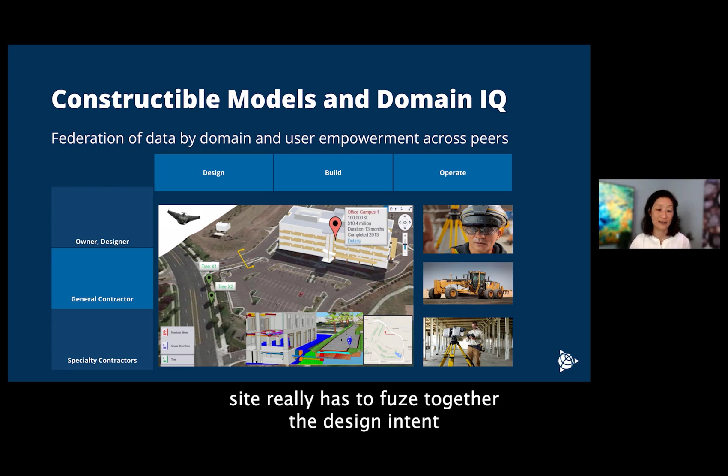Trimble uses this notion of constructible models and domain intelligence. This is how we represent a source of truth for the data at every stage. Primarily, the build phase in a connected construction site has to fuse together the design intent and the expectations in the life cycle of how that asset will be operated.

Not only is that a broad set of data that is shareable, but it needs to be served up to the actual domain—whether it's an owner needing the data or real-time updates, or a general contractor trying to coordinate a number of specialty contractors. There is no one single model to rule them all, but more distributed and federated data that comes together in the broader system.

Spatial anchors is something Trimble worked very closely with Microsoft on. How do we take spatial awareness and ground it to digital models within physical reality? The notion of spatial anchors is a mixed reality technology where we can perceive spaces and designate markers at precise points of interest in the physical world.

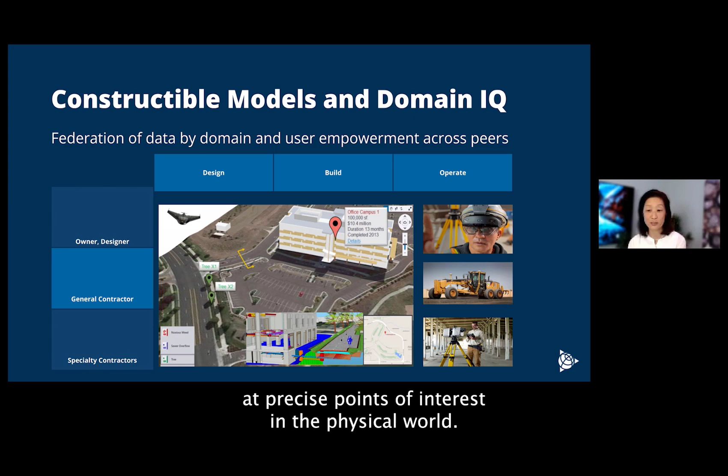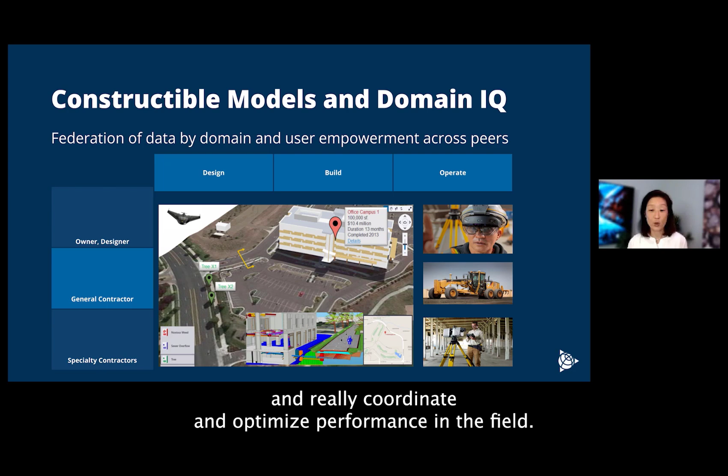This also helps create visual anchors. Someone in the top right there is wearing the lenses. We had a product from Trimble called the XR10, where we used our Connect collaboration technology with Microsoft HoloLens technology to bring together an experience for a user in the field, improving the precision and accuracy of the data model overlay and coordinating and optimizing performance in the field.

It was originally done for training purposes, and now even for expert users, the ability to get the data at that point of work is super efficient and avoids a lot of rework. The key is really how we handle that federated data, understanding who the user is and what data they need, and the contextual data needed for situational intelligence.

This moves us from linear hierarchical handoffs to more coordinated contextual information at the application and user level. Now that we understand who the user is and what data they need, this is bound together at the level of workflow orchestration.

Workflows orchestrate the data and the users at a point in time, enabling both bidirectional data flows as well as iterative engagement models and a closed loop where we can constantly check the desired state or design intent against the actual physical conditions.

This is also leading to more effective as-built information as an extension of the actual design models. We can manage exceptions, and we can also manage change at the level of composable objects, whether those are model objects, content, or asset inventory data.

Trimble recently acquired Agile Assets, who has been using digital twin technology for things like roads and bridge inspection and better preventive maintenance for the physical world. The key thing is that the delivery model also changes to everything as a service, and this is where cloud technologies are most desirable—a lot of the underlying enablement is hidden from the end user.

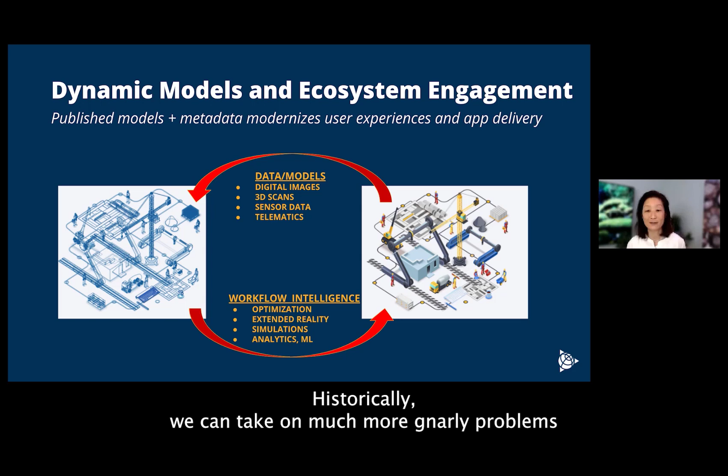So there's a lot of complexity, but I'm very bullish as we build more extensible models for what is to come for the future, as opposed to automating tasks that have been done a certain way historically. We can take on much more gnarly problems, as well as evolve the incentives to be more carrot versus stick, and not just managing risk, but really thriving with a growth mindset.

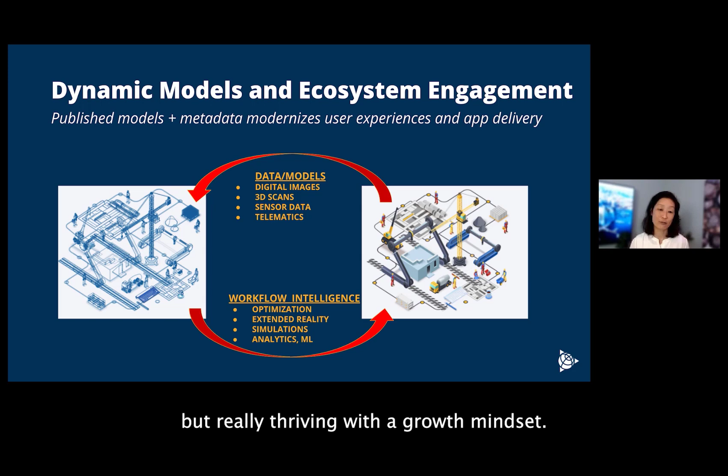Publishing these models and best practices across the industry also helps us just modernize the industry and digital app delivery. I think it not only helps us recruit the next generation into the industry, but it also unlocks a lot of the creativity and safe experimentation that we're going to need to tackle a lot of society's biggest challenges moving forward that will fall on the design and construction industry to take on.

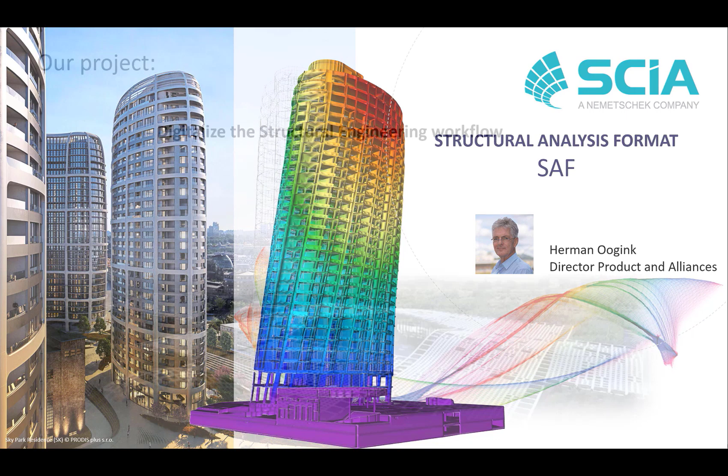Hello, my name is Herman Oogink and I'm going to present you the structural analysis format called SAF. I have been involved in this project from the beginning and I'm proud to be able to present it for this audience. Let me first explain where it all starts.

At Nemetschek we started a project focusing on improving the workflow for engineering. It's a broad project and still ongoing. For that we interviewed many engineers around the globe. One of the findings was that engineers would like to have an easy to use exchange format for their analysis model. So we dived a bit deeper into that and found the next demands.

Be able to check the analysis with other software without entering the whole model again. When there are complex models, they want to use tools to create these shapes and need to get that into their analysis software - tools like, for instance, Grasshopper. Also, adjusting models via an easy format can speed up the design process. Be able to do checking of models after analysis with other available tools, for instance do a connection design after you have analyzed your model.

And be able to read in-CAD embedded analysis models. Be able to read the in-CAD embedded analysis model. Now only proprietary formats are used.

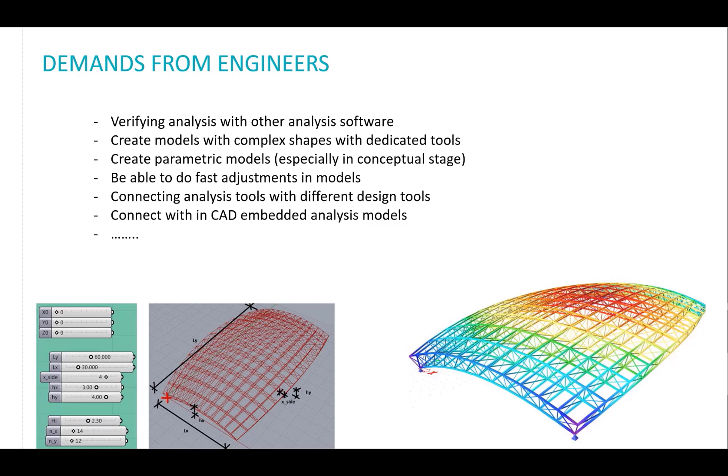Based on this input, we created SAF, Structural Analysis Format. It is an easy to use format for all kinds of structures and can be used for exchanging models, but can also be used for creating models manually or via other dedicated tools, and it is based on a tool that all engineers love, and that is Excel.

As said before, Nemetschek took the initiative, and to be more precise, it is SCIA who is leading this. But it is an open format and we encourage you all to join. It's not intended to make it a Nemetschek standard.

Let us now look at the format itself. You see here the Excel layout, and each sheet in the Excel is an object type like beam, slabs, boundaries, etc. Each row is an instance, a specific element, and each column contributes or stands for an attribute.

Let us look at how the relation between the objects are defined. We have, for instance, an object node defined on a specific sheet called the structural point connection. These nodes have a name, and these names are used in the definition of structural curve members, structural surface members, and structural surface opening.

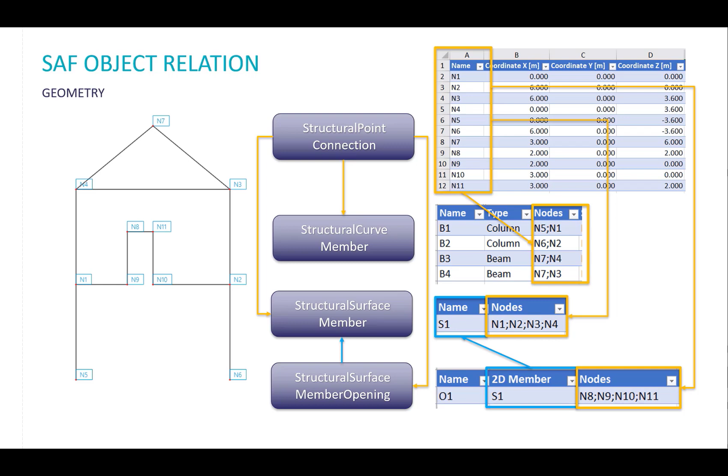Also for cross sections, we have a sheet where these object types are defined. Each cross section has a name. When defining the structural curve member, these names are used to refer.

Material is also an object that has a name. This name is used in the definition of the cross section and via the cross section to the structural curve member. And it is used in the definition of the structural surface member.

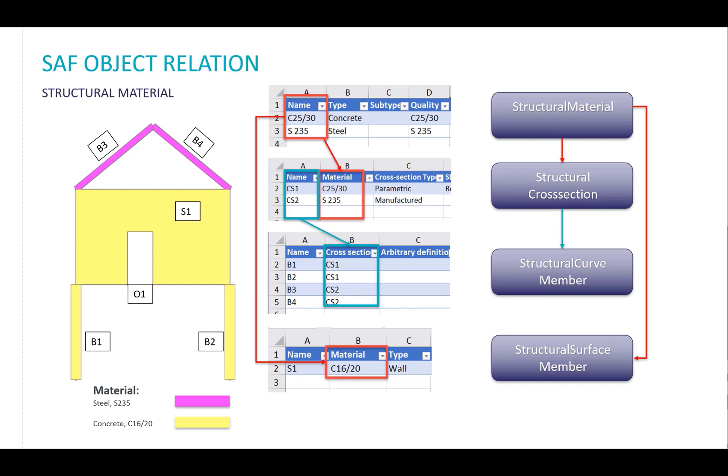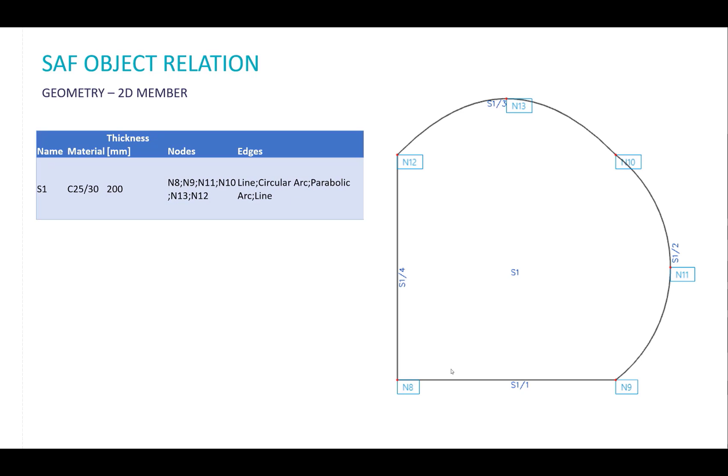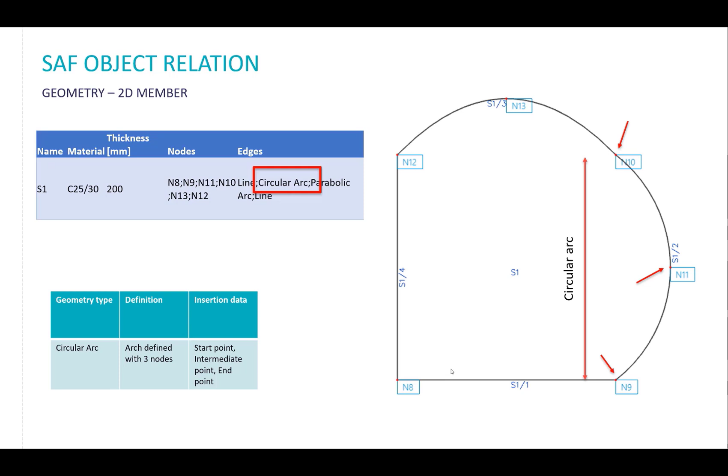A bit similar is the definition of the geometry for surface members. The edges can be defined via a line, parabolic and circular arcs and Bezier curves, as you can see. Also here we start with defining the edge, start node N8 and end node N9, with a line in between. And then we have, for instance, the other curve, which is a circular arc with a start node and an end node and an N11 as the intermediate node.

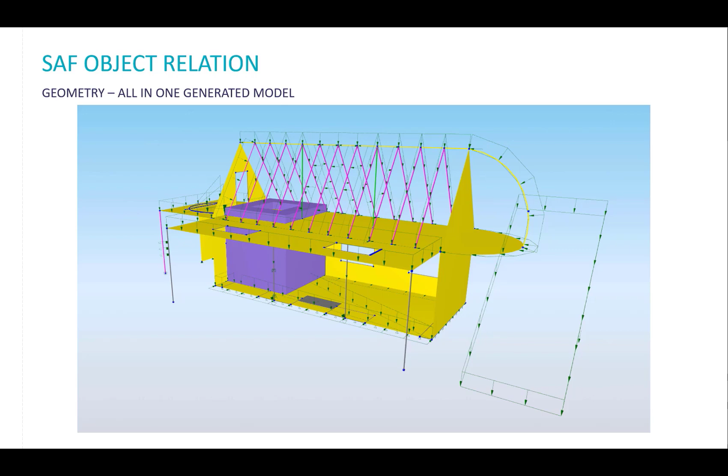Here is a non-realistic example containing all objects we have defined so far, and this we are using for testing. I think it's not realistic, but I think it's a nice way to test the import and the export of the SAF model.

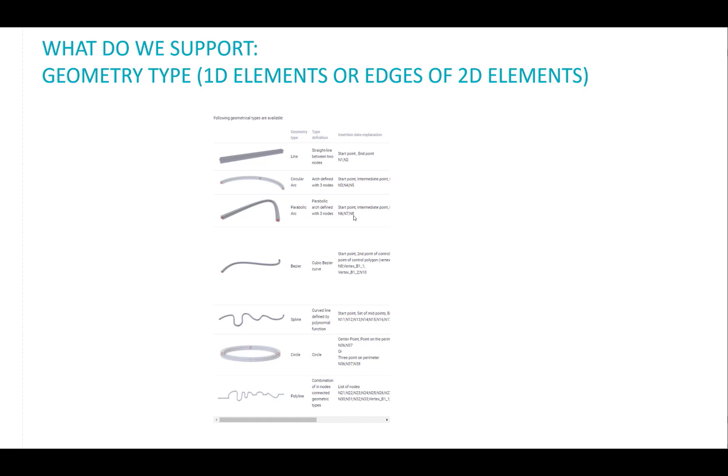Let us now have a look at the geometry. Here you have an overview of all geometry of curved members and the edges of surface members that we support. We have lines, circular arcs, parabolic arcs, Bezier curves, splines, circles and polylines. This counts for the 1D curved members and also for the edges of the surface members.

We also support curved members with varying cross-section. The beam is then separated into segments, and each segment has a cross-section at the beginning and at the end.

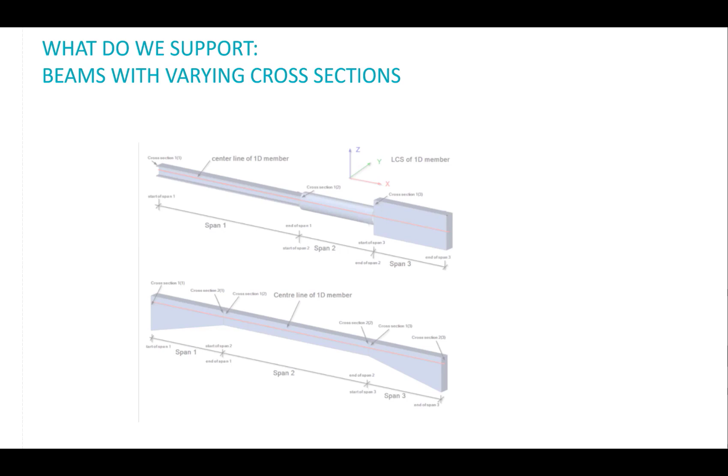Let us now look at the different cross-sections we support. We have the parametric shape, the compound shapes, the general cross-section defined by polygon, and the manufactured profile. Let us look at them one by one in more detail.

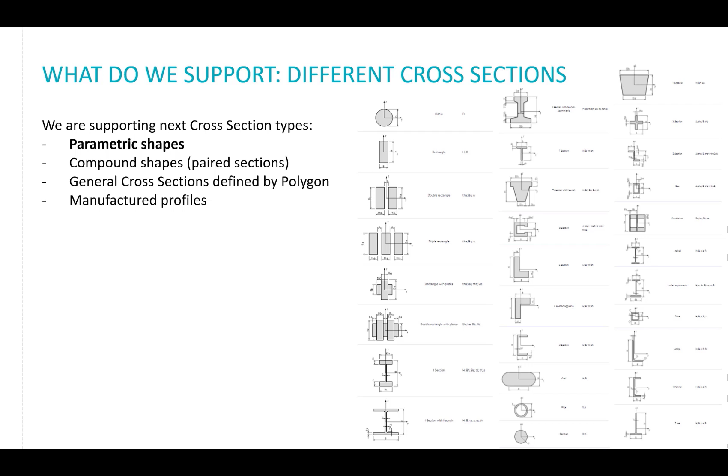The parametric cross-section we have defined in SAF, you see on the right side. You see all the shapes, and each shape has the parameters needed to define it. As you can see, it's quite an intensive list of possibilities. The same counts for the compound sections, where the most common used paired sections are defined.

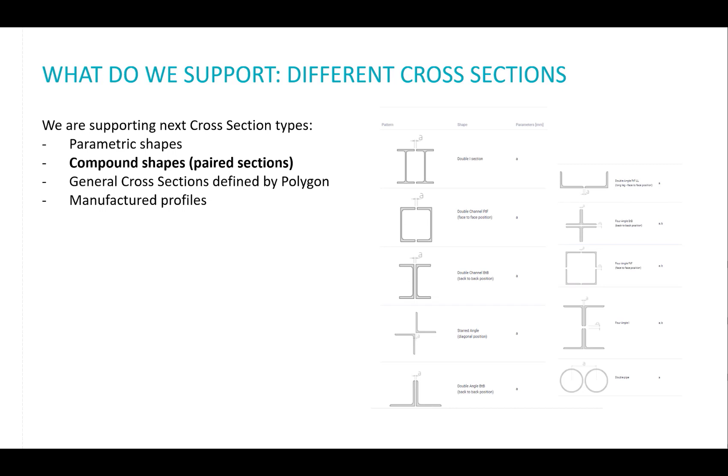The general cross-section definition is the most general one. As the name suggests, here you can define each shape composed out of different materials and openings. So here you see, for instance, one material with opening, a cross-section with opening, and here for instance a concrete rectangle cross-section with a steel section inside. So really a composite cross-section is what you are creating.

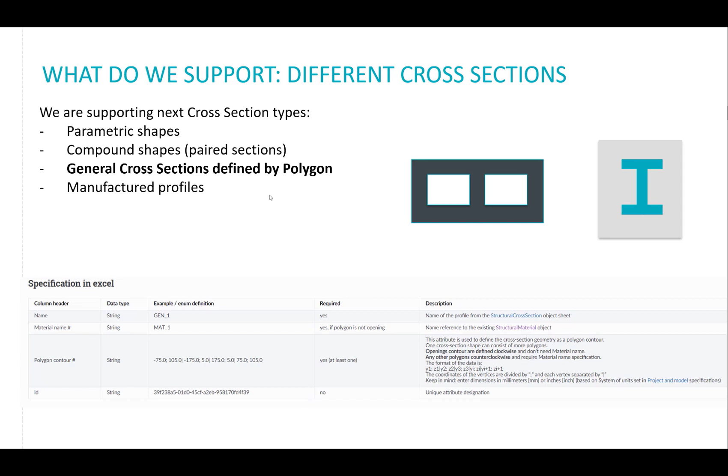Then we have the manufactured one. Initially you would say that is the most easiest one, but it isn't. The complexity is in the use of naming, which is not standardized, but also the definition of the local coordinate system that is used in the manufactured cross-section libraries by each software vendor.

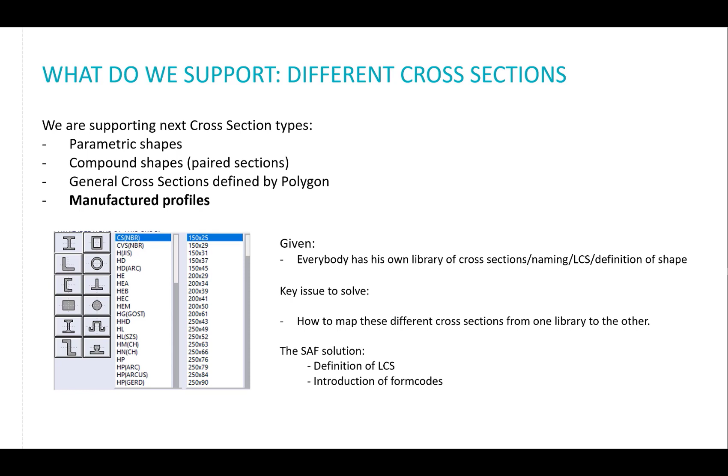But only with an alignment of the local coordinate system we are not done. How the shape of, for instance, the T-section is defined in the vendor's library can be different - the flange at the top or at the bottom, for instance. Both ways are used. Or what about an L profile - how is that oriented in the local coordinate system by the vendors? To solve that, we invented the so-called form code that defines the orientation. I will explain this a bit more in depth in the next slides.

In SAF, you have to tell which local coordinate system is used when writing to SAF, so the receiving party knows it and can act upon it. So one of the model data is how the local coordinate system is defined by the one who wrote that SAF file.

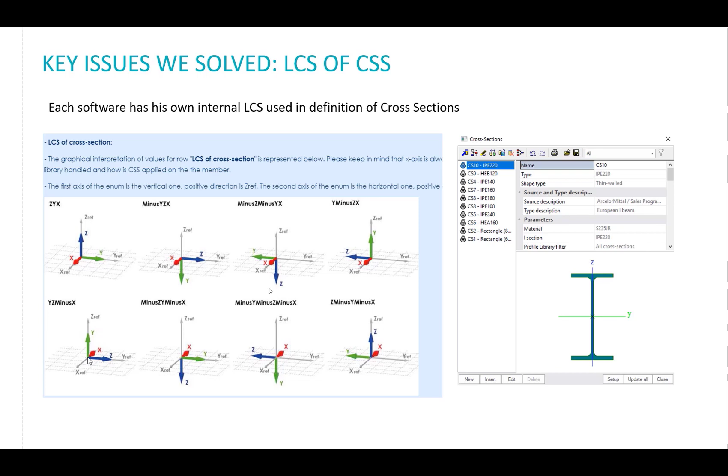The other topic is the orientation of the shape in the local coordinate system. As said before, some define a T with flange at the top and others with the flange at the bottom. Here you see, for instance, a T-beam could be defined like that, or like that. For that we defined a form code for all kinds of shapes and orientations. If you see this table here, we have different form codes - in total about 23 form codes defined. You see for a T with the flange at the bottom we use 6, and for flange at the top we use 9. The same for the L profiles, we have different numbers for how those profiles are defined.

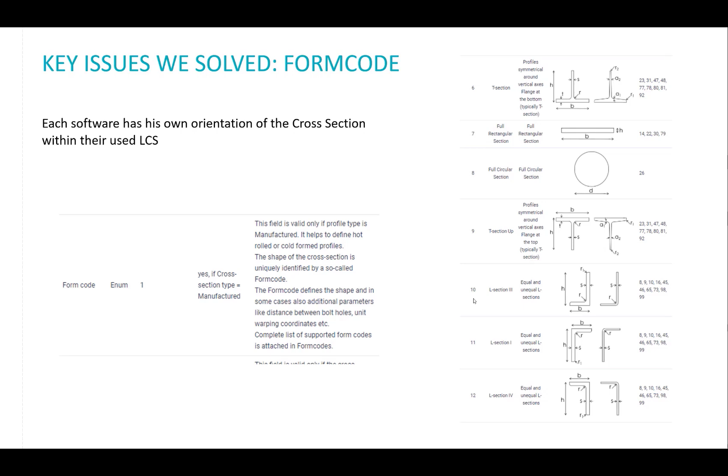We also thought about interaction with CAD systems. Curved beams or walls, etc. are common in CAD systems, but not all analysis software can handle that. For that, we introduced the possibility of having a curved wall as parent and dividing it into straight segments that are charged from the parent curved wall. With that, we have a relation that can be kept, and in the analysis the wall is calculated in segments, but we keep the relation with the curved wall in the CAD system. So if you want to do round tripping, that is secured in this way.

Another development we did is making a software development kit available for vendors to be able to implement SAF in a fast and easy way. It's written in C# and available on GitHub. It covers automated unit and integration tests. It is already used by a lot of vendors who support SAF at the moment.

Now the highlights of the SDK is that old and new versions are supported. It's up and downwards compatible. All objects are validated, and we support metric and imperial units. With validation, I mean we check if the input is valid. Are you referring to a material, and is that material defined? Referring to a cross-section, is that cross-section defined, etc.

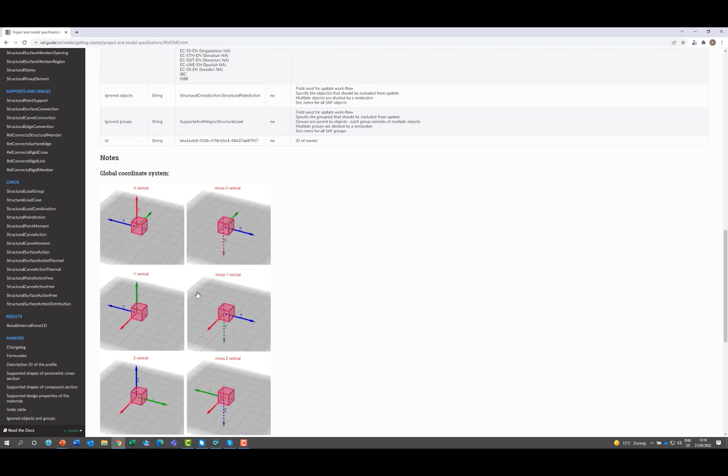And here you see the definition of those global coordinate systems, which I mentioned before. We have the curved members, for instance the curved member varying, it's defined how the attributes have to be defined. We have the surface structural edge connections, for instance the boundaries, how we define them. We have the loads defined here.

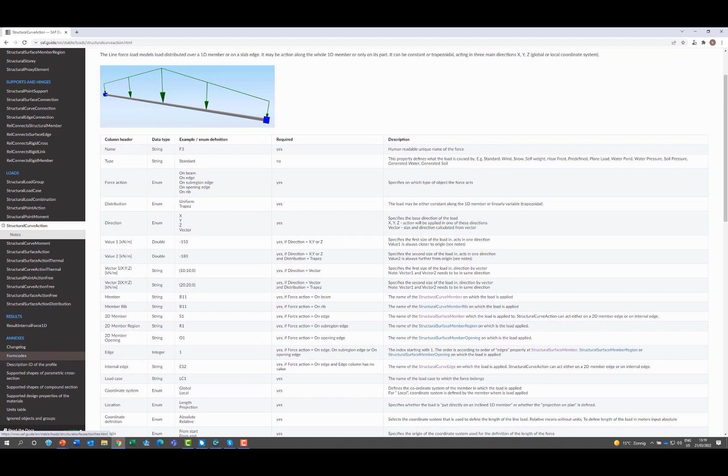We have the curve action, let's have a look at this one. And also the results, internal forces, which are already explained - that's quite new - for 1D elements, so you have your internal forces available. Here we have the form codes, all the different form codes for all the shapes you can imagine. So we are coming to 23 form codes.

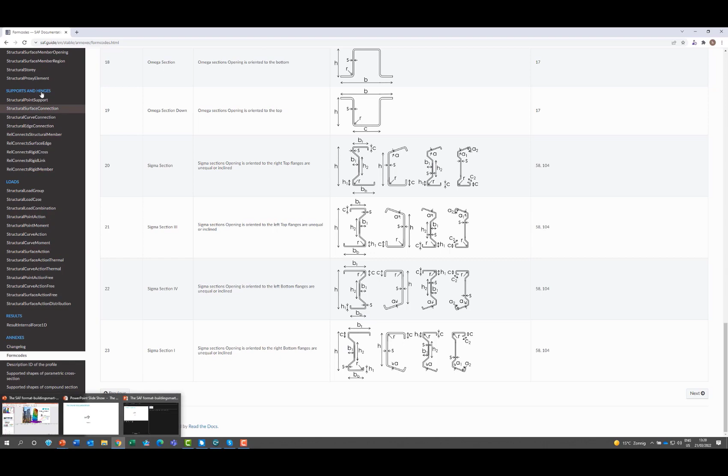And I think that's all I want to show you. You can go to it, it's saf.guide. It's available for everybody. Just click on it, go to the website, or just type in saf.guide and you can use it. Well, let me go back to my presentation.

So how do we work? Now, we use GitHub and Microsoft Teams for communication. We have a general chat for all participants, so if we want to discuss something in general. But we also have a one-to-one chat for implementers, when they are dealing with a specific issue topic which is really only relevant for them, they can get in contact with us and we can help them.

We are collecting the new demands and we do voting. The collecting of demands comes from wishes from all the participants. Then we collect them and do voting, and based on that voting, our priorities are defined. Then normally we come up with the specification, make a first draft, and ask others to comment on it. If we finally all agree, we make the final definition and put it into the SAF documentation. We adopt the open source SDK and use it internally to test it. Then we collect feedback and adjust if needed.

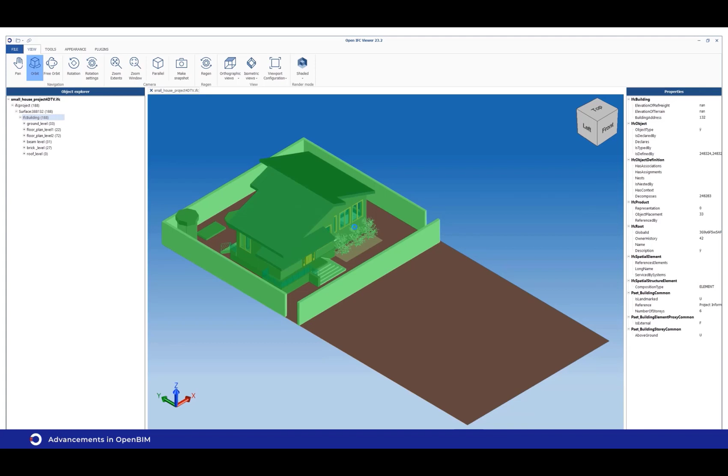This functionality is currently available in beta and will be available for production use in June of this year. In addition to being included in our SDK, it will be available as a standard end-user feature in our Open IFC viewer.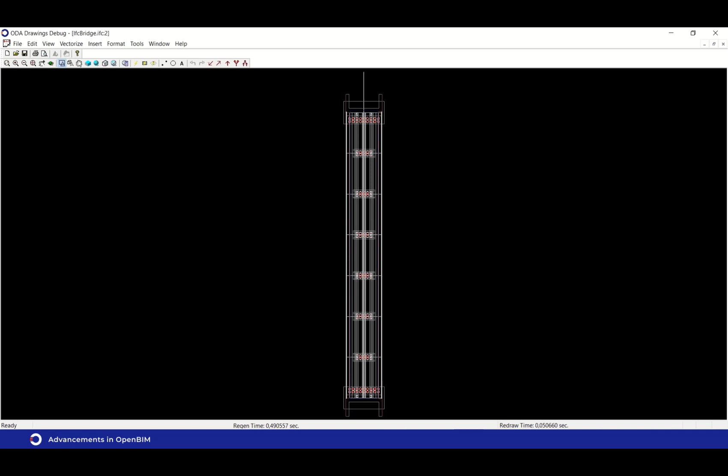Here you can see an example of an IFC 4.2 model of a bridge that's been converted to DWG and then opened in a native DWG-based application. In addition, we can import DWG geometry into an IFC model.

There's a strong industry need for tools to validate IFC models. ODA released a validation engine for IFC last year, and we made validation a standard feature in our free Open IFC viewer. Our validation engine incorporates an early version of the new IDS standard from BSI. IDS, or Information Delivery Specification, defines the requirements for the exchange of BIM data. IDS is still under development by BSI, and we'll be updating our validation engine to use new versions of IDS as they're published by the IDS working group at buildingSMART.

In addition to IDS, ODA has also recently added support for MVD XML. A model view definition, or MVD, defines a subset of the IFC schema that is needed to satisfy one or more exchange requirements. MVDs are encoded in a format called MVD XML, and they define the allowable values at particular attributes of particular data types.

MVD-XML is often used to customize the export of IFC data. It's an older specification that was first published in 2013, but it's still in use today and is quite popular with some companies. ODA has implemented an initial version of MVD-XML support that includes an API for reading, accessing, updating, and writing MVD-XML data, and support for interpretable expressions.

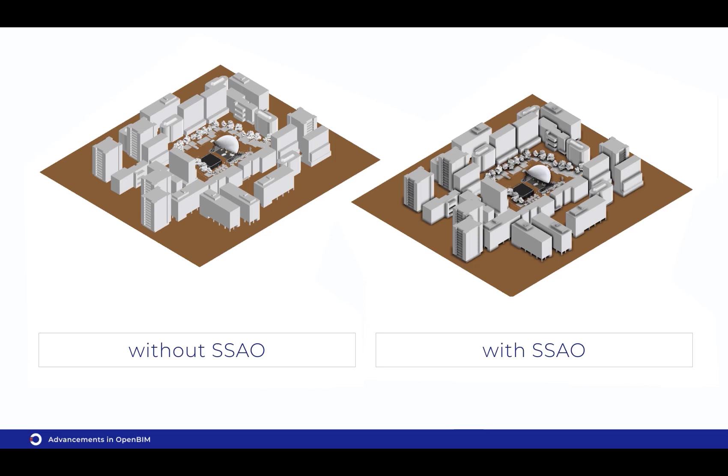The first is better visual fidelity. We use a technique called Screen Space Ambient Occlusion, or SSAO, to simulate the effects of ambient lighting in a scene. SSAO makes a scene look realistic by adding subtle shadows in the corners and around the edges of objects. We've improved our SSAO support significantly since last year, and you won't notice this difference dramatically if you open a file in our latest viewer, but the scene will look better, more realistic.

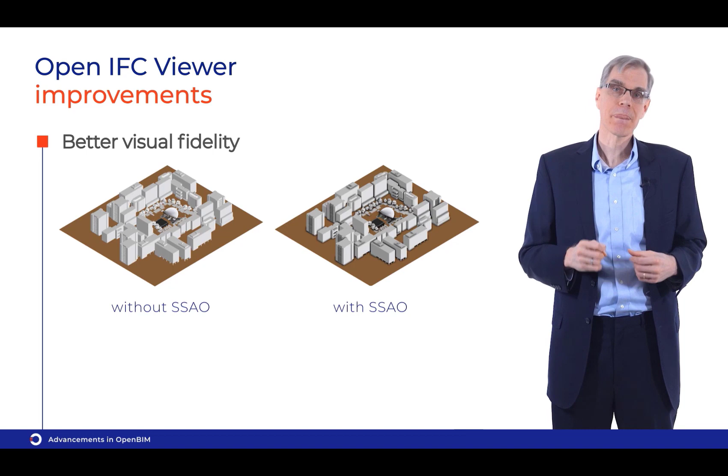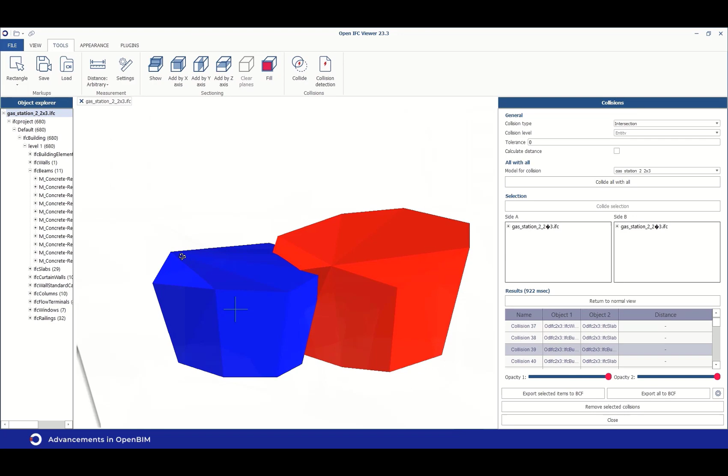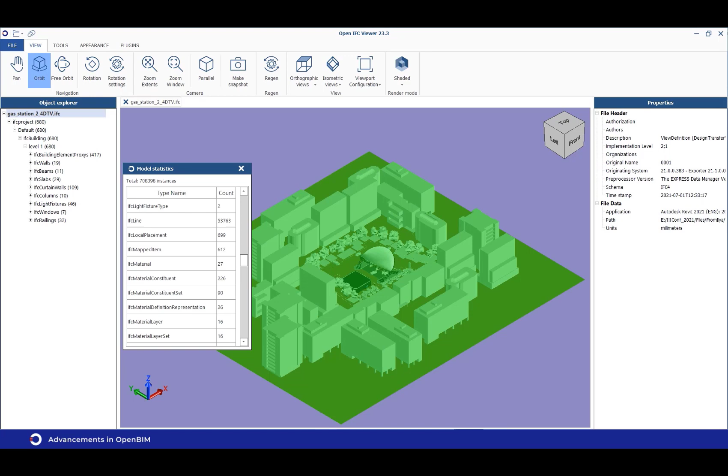Another significant improvement is the addition of a plugin framework for the viewer. We often get requests from customers who want to customize the viewer in some manner. The new plugin framework provides a clean and modular interface for adding new features. We're using plugins now to implement the BCF manager and the validation component of the viewer. We have a new model statistics plugin available from the context menu by right-clicking on a model that shows instance counts by element type for the model.

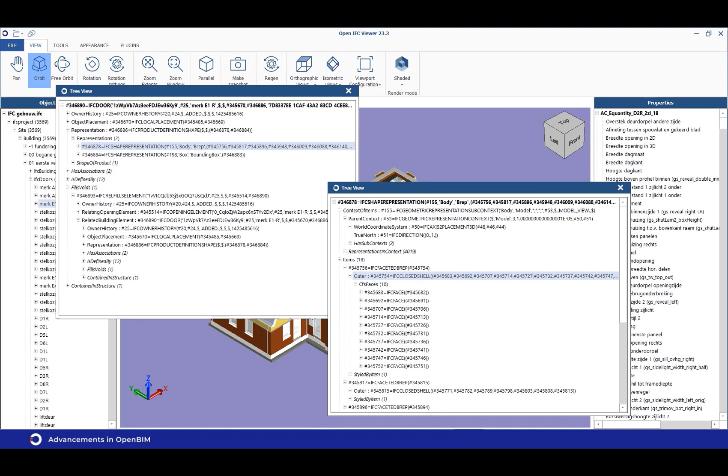A new tree view plugin is a powerful tool for IFC model investigation. It allows navigation among a model in tree view form, and it's possible to open several trees simultaneously. Tree view is available from the context menu by right-clicking on any node in the Object Explorer tree that has an underlying IFC instance. I would encourage anyone who needs a customizable, professional-grade IFC viewer to check out openifcviewer.com. Full source code for the viewer is available to all ODA members.

As a not-for-profit professional software development organization, ODA is the leader in toolkits for open standards. We're an industry partner that develops high-quality solutions for the long term. In addition to IFC, we now support STEP, the open standard for mechanical CAD. Both IFC and STEP SDKs are based on the same SDAI implementation by ODA, so data from both formats is available using the same ISO, SDAI, or C++ APIs.

We released a beta version of our new STEP SDK in December of last year, and the current version already has enough functionality for creation of any desirable STEP model, including AP203, AP214, AP238, and the latest AP242. By the end of this year, we'll have full production support for STEP, including data access, editing support, geometry visualization, and the ability to do combined visualization of STEP and IFC models.

STEP and IFC can also be combined with other ODA-supported formats, including DWG, Revit, Navisworks, and DGN. Clash detection can be done on the combined model, and you can also export the combined model to 2D or 3D PDF or to Navisworks.